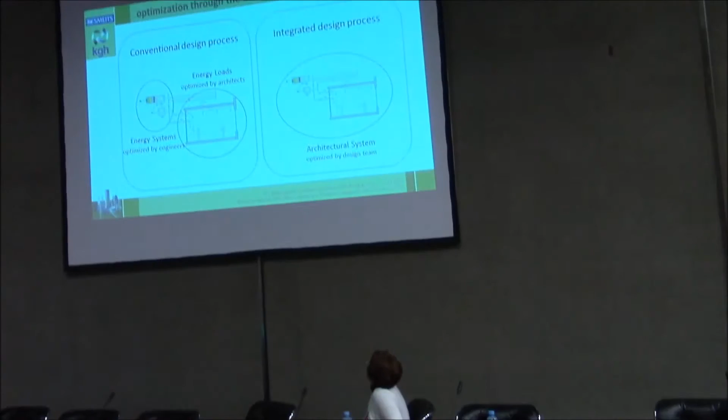Looking at the buildings that have been constructed during the last 30 or 50 years, the process that was followed was typical. The architects were designing the buildings, and the engineers were putting in the HVAC systems. And that led to energy systems optimized by engineers and energy loads optimized by architects, when what we need is an integrated design process that would lead to an architectural system optimized by a design team.

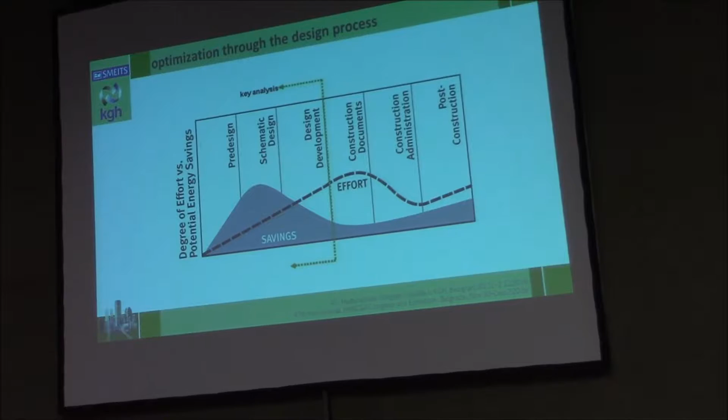Looking at the various design phases of a building, the majority of decisions should be made at the very early design stages in order to achieve significant money and energy savings. The initial sketches that determine the massing of the building, the attitude to the building enclosure, and the programmatic energy distribution are setting the stage for all the energy to be used later.

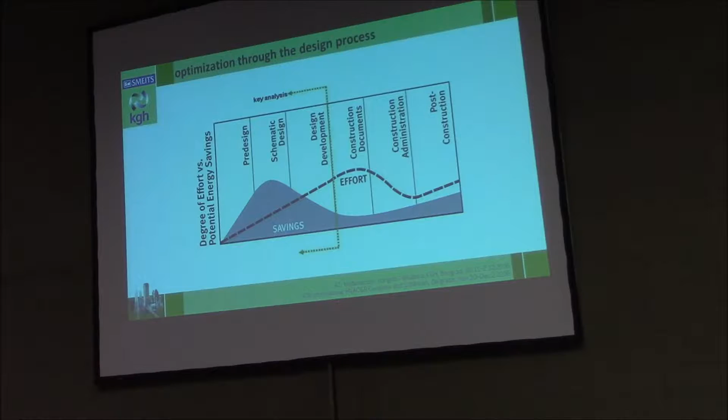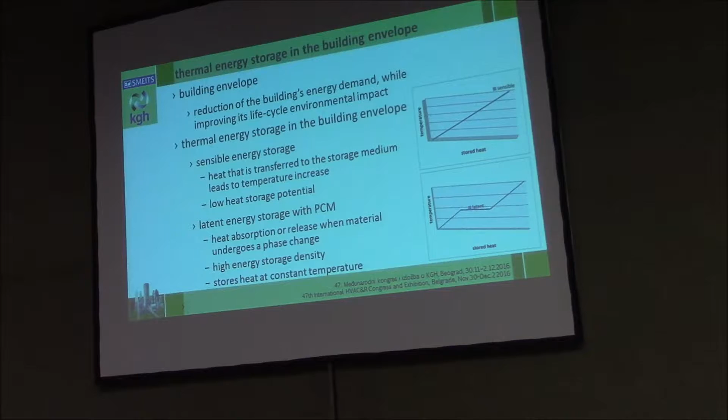It is therefore evident that the building envelope can have a significant impact in the reduction of the building's energy demand while improving its life cycle environmental impact. And one way to achieve this reduction is if we implement thermal energy storage in the building envelope.

Thermal energy storage can be applied either as sensible energy storage, where heat transferred to the storage medium leads to temperature increase and there is low heat storage potential, or through latent energy storage with PCM, where the heat absorption or release happens when the material undergoes a phase change. When we use phase change materials, there is a high energy storage density and heat is stored at a constant temperature.

This way, when latent energy storage with phase change materials is implemented in the building envelope, it is possible to have smaller mechanical systems and systems that achieve better efficiency because the space cooling shifts from daytime to nighttime. It is possible to use solar energy for heating because of larger accumulation capacities in the materials. We can achieve better temperature control because there are lower temperature swings within the space, while it is possible to have high thermal mass in small material volume in lightweight buildings.

In order to evaluate the performance of phase change materials, an integrated analysis is needed, and sometimes it consists of multiple interrelated variables. This is why we need multi-objective optimization. In this case, there are multiple, usually conflicting objectives that need to be optimized, a specified number of constraints that need to be satisfied, and a number of design variables which, when they change, affect the objectives that will be optimized. When we run a multi-objective optimization tool, the results that we get are usually a set of alternative solutions involving different trade-offs, named Pareto optimal or non-dominated solutions.